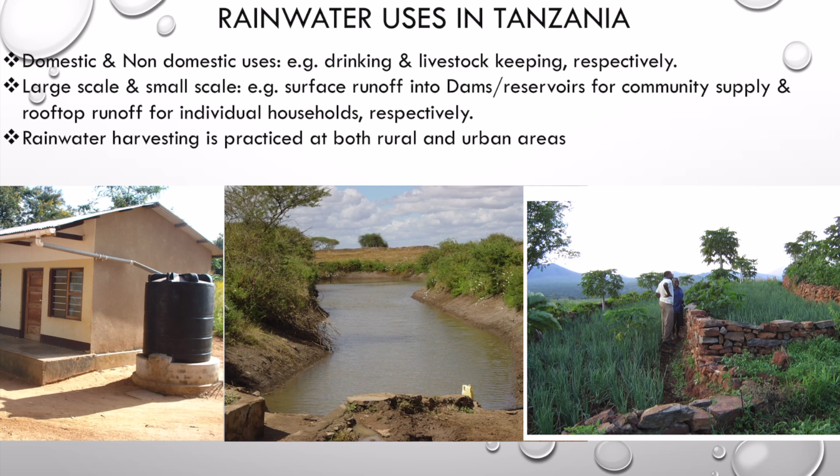And at large scale, we have projects harvesting surface runoff into dams and reservoirs. Ongoing, we have projects as large as an over 470 million cubic meters dam under construction to harvest for community supply. So rainwater harvesting in the country is practiced in both rural and urban areas.

However, there are concerns around rainwater harvesting technology, whereby people are concerned with the high investment cost of rainwater harvesting infrastructures, but at the same time, concerns over quality. People would complain that I put water, but after a few days, I would notice the smell, the change of color, or even some insects. People are also concerned whether the roof type they have will be contaminating the water and affecting their health. All these are concerns.

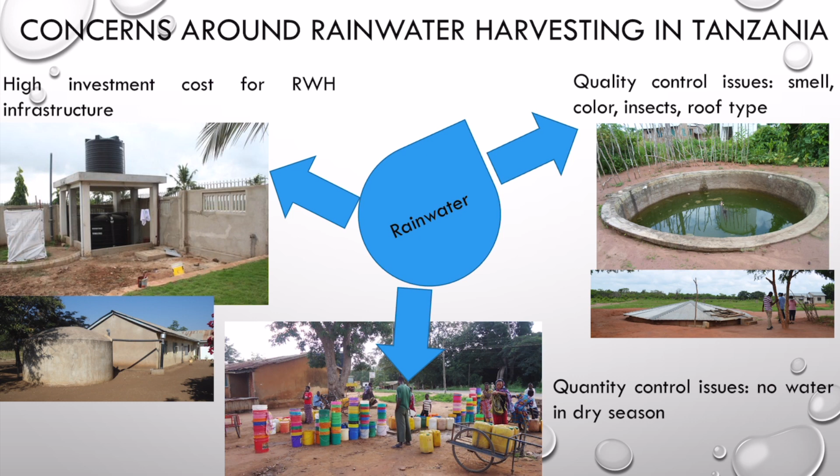There are also concerns on quantity, whereby people complain of rainwater not lasting towards the dry season period. So with all these concerns, we feel obligated to provide answers as we are promoting the technology. From practical experiences and research works, we come up with feedback. And in place since 2020, we have the rainwater harvesting guideline, which offers guidance on most of the queries people have had: how best to make use of rainwater as a domestic source, how to design the storage facilities, the considerations, finances, and maintaining the quality of water. All these are captured in this guideline document.

As we are moving around, getting in contact with people and getting feedback from users, we notice things and we try to improve them. We notice that most people harvest rainwater straight from the roof into a storage tank. So you can imagine with a prolonged dry season, the accumulated dust gets washed into the storage system, and the environment within the storage system is very favorable for the growth of microorganisms, which people later complain about because of this entry of organic matter.

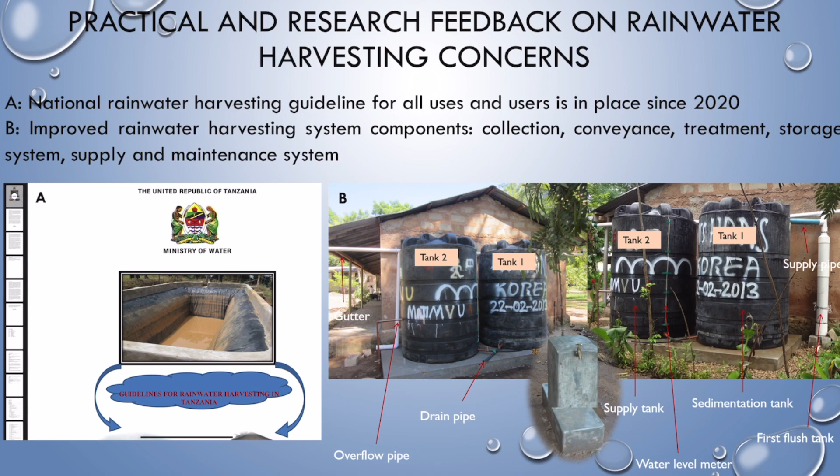But also with concerns of water not lasting through the dry season, from the research works, the daily water balance model accommodates the catchment size, incorporates the rainfall distribution, and takes into consideration the demand size to provide an estimate of the optimal storage size. We don't want a storage system which, after a short duration of rainfall, is full and the water gets wasted as overflow. But at the same time, we don't want a storage system so large that throughout the year it's never even half filled, which is a waste of financial resources. So we want that optimal storage whereby as rainwater fills it, water is going out for consumption, but then there's that refilling process.

But at the same time, we have water being available toward a certain period within the dry season. So you can see from the illustration, which is the output of the model, the range of time within a year whereby the rainfall water is able to meet fully the demand of the given community or family. But at the same time, we see that there's a period where it meets partially, and that is when we have to consider the alternative supply to supplement the rainwater, so that one is able to meet their water needs within a given period. So this is one example.

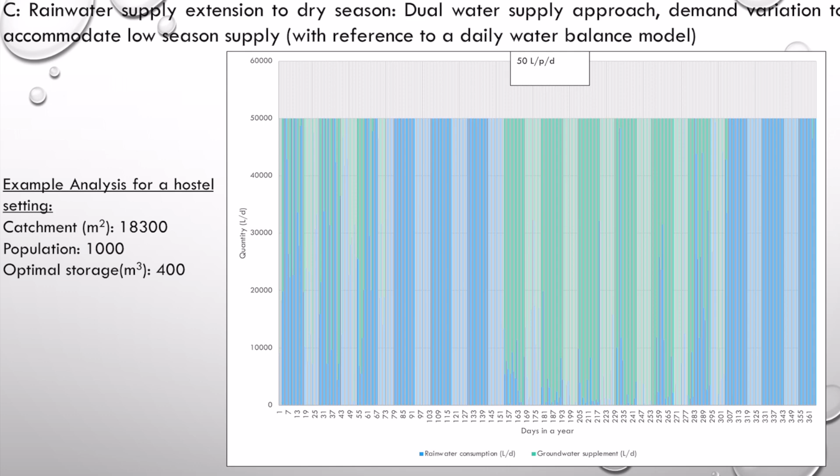So with the fluctuation of the rainfall, the consumption is varied accordingly, and we know that would affect the water level in the storage system. So in the end, one is able to be fully water self-sufficient.

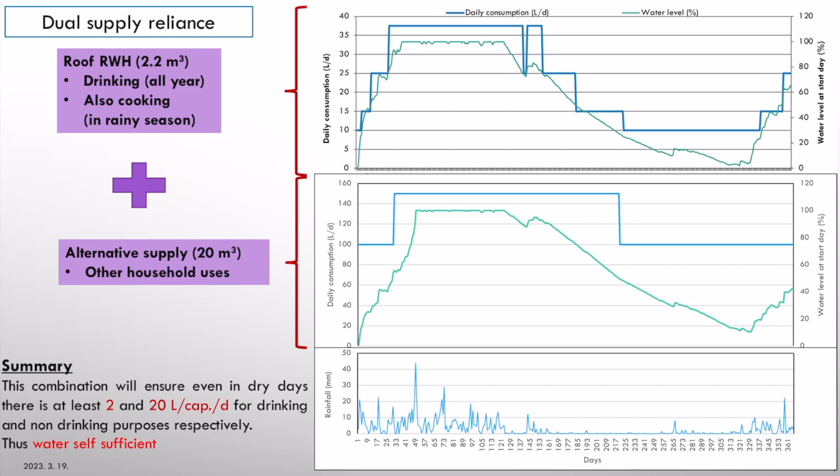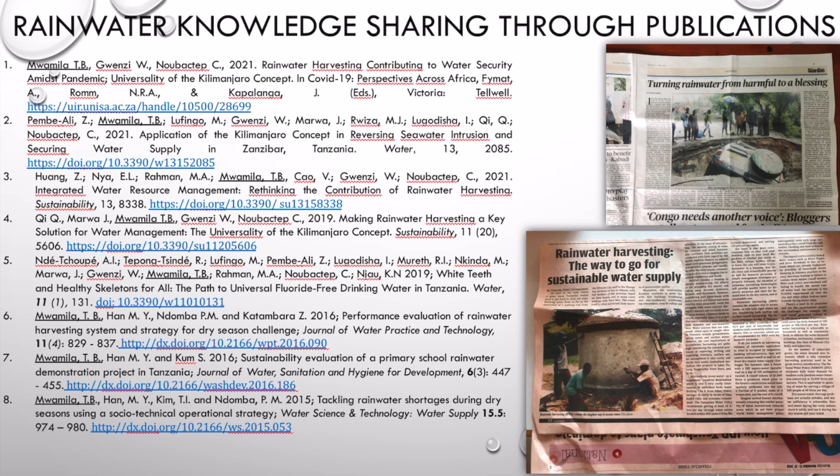So all these updates in knowledge, all the advancements in rainwater harvesting technology, are being shared through publications in academic platforms, but as well in non-academic platforms in media outlets, whereby more people can reach and gain this knowledge, and even in local language, so that more people can understand the information that is being shared, adopt it, apply it and improve the experience with rainwater harvesting.

But at the same time, we understand the need for sustaining the technology. We want it to go through the generations with all these advancements. So with that in mind, we are involving children as well by constructing small physical rainwater harvesting models. We empower children. They get to experience how the rainwater harvesting system would look like, its components. They ask questions, they get to feel it and try it. They understand how to maintain it, how to manage it.

So we believe with this knowledge, they can influence their own families, and as they grow, understand it and later on even apply it. So then it is moved from generation to generation, and better yet, improved on, because they will notice a certain discrepancy, and we believe they would work to improve that.

So in other approaches also, we are having this demo construction project. Most of these happen within schools, primary and secondary schools, and even health centers. So when it's around that environment, the children, the pupils, get involved in one way or the other in helping out with the small activities. And we believe by that, they learn from seeing and also touching, actually getting involved.

They get to understand the stepwise procedures towards having the system in place from the start all the way to when they can enjoy the service of the water. So we feel that knowledge gets instilled in them, and they get to understand it even better. So all these are efforts in empowering the children so that we can take the technology to the next generation.